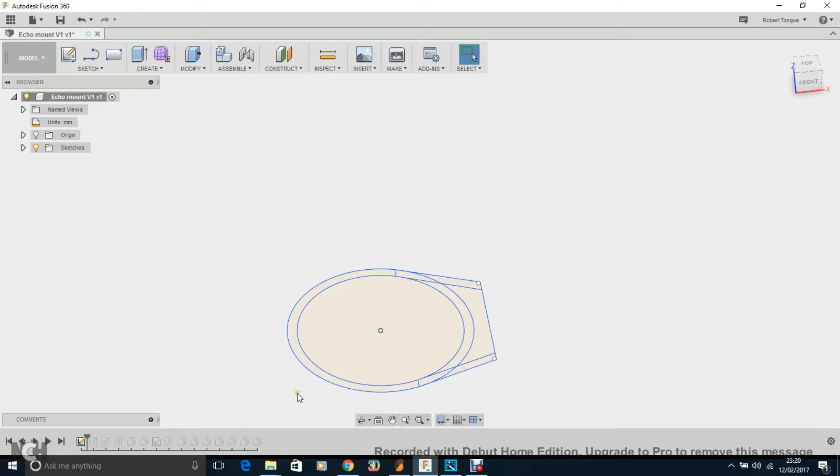So what I started off with was a sketch. The measurements between here to here are actually 84 millimeters. If I go into edit, let's have a look - there you go, so 84.5. I think I measured the Echo at just under 84 millimeters. I know the printer does good tolerances, so I wanted it slightly bigger to fit it in, and that was it. Next was a ring.

I did 5 millimeters around there, so 5 millimeters will be enough strength to cover that. What I'm going to do is extrude this base here by 5 millimeters, and then this is just a bit long here, and this bit will be against the wall with the holes in.

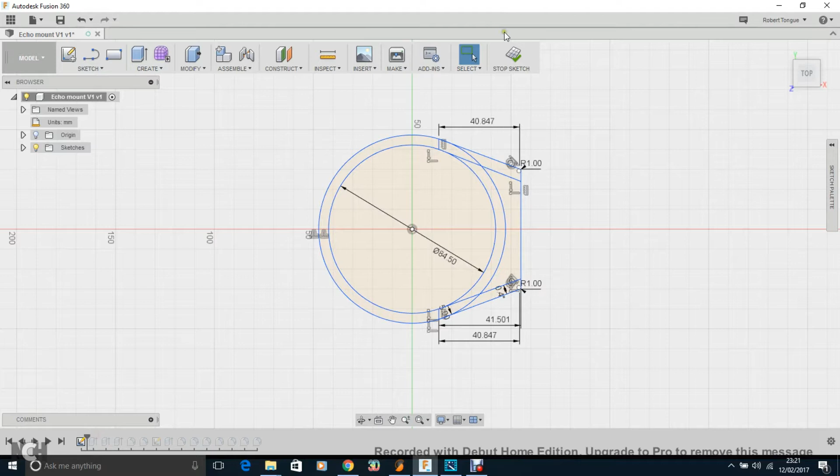So the next step was to start extruding. Let's move it along - let me just stop sketch a sec, and we'll move it along. I'm doing this with a laptop and a touchpad, so it's a little bit awkward, and I'm an absolute noob at Fusion 360. I have no idea how to use it, so I'm just mucking around trying to do this.

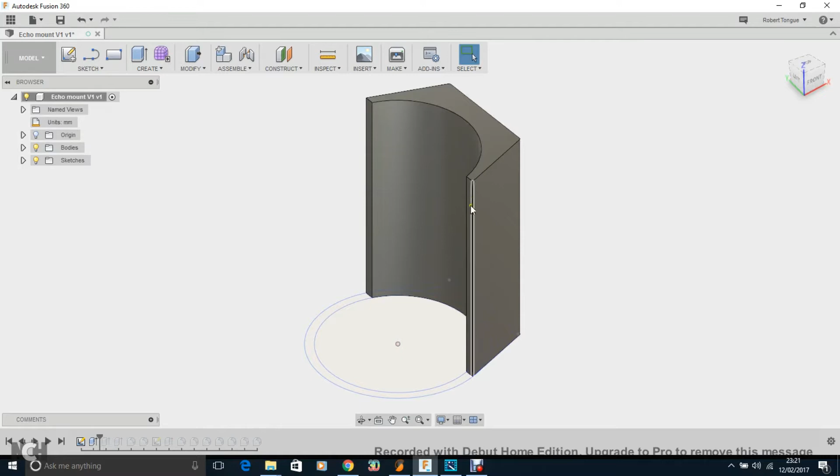So first step was extrude this bit here. I had to do it with a line there because otherwise this goes into a sharp point and then the rest won't fill it properly. So I learned that the first time I tried it.

So this was, I think, about 120 millimeters high - about almost halfway up the Echo. Next step was the base, so like I said, 5 millimeters.

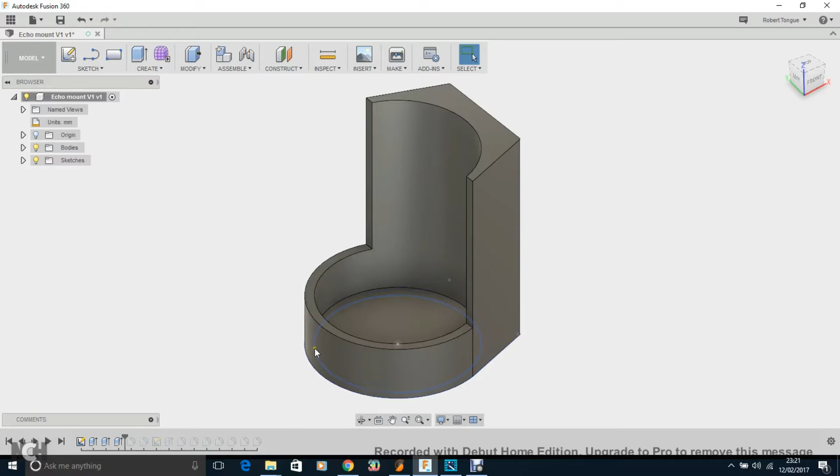Next step, the front bit here - now this bit I did at 30 millimeters. So the base is 5 millimeters, Echo would be on that, take away the 30, you lose 25 millimeters height difference basically, and that leads up to the beginning of the speaker on the Echo. So the speaker isn't covered around here.

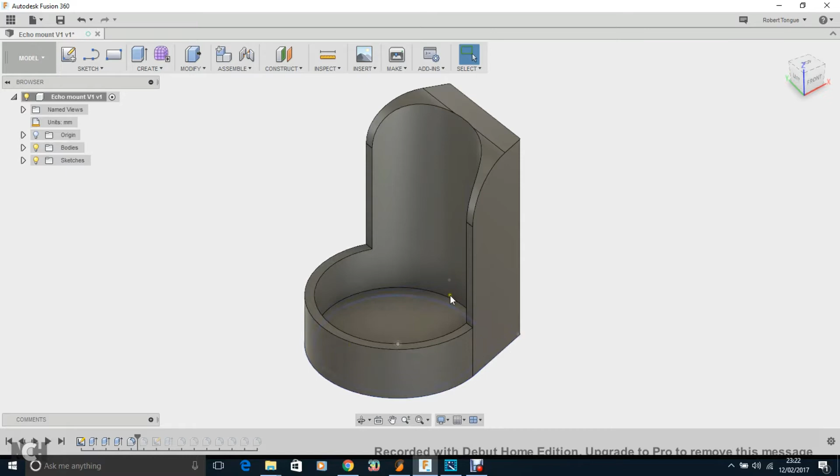So next step, just filleted these down. What I originally wanted in my head was for it to be round like this low at the beginning, and come up smoothly and join there. It was awkward for me to get a completely perfect thing like that, as you can see the movement I'm doing, but with a few fillets I managed to get it looking pretty good, and it's really stable around the Echo. So already you can see that's looking like a nice little mount that the Echo would fit into.

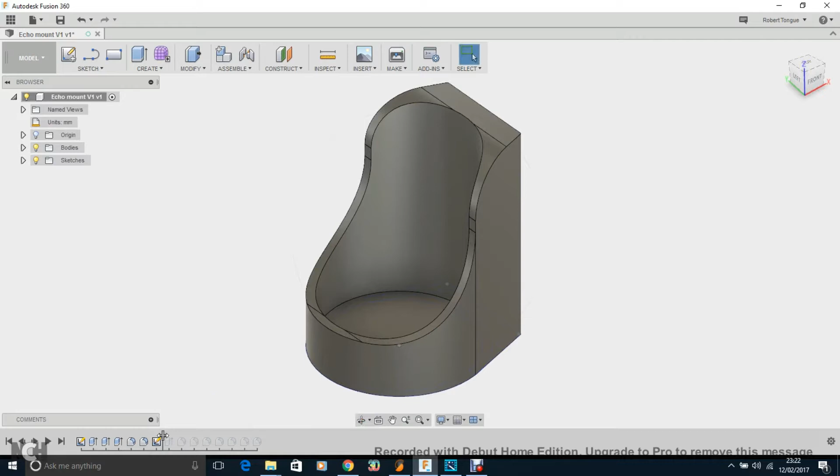So the next step was adding in a sketch, basically for around here to do some holes. If we extrude here - there we go, you can see that hole there. So basically that's for the cable, the power cable to run in.

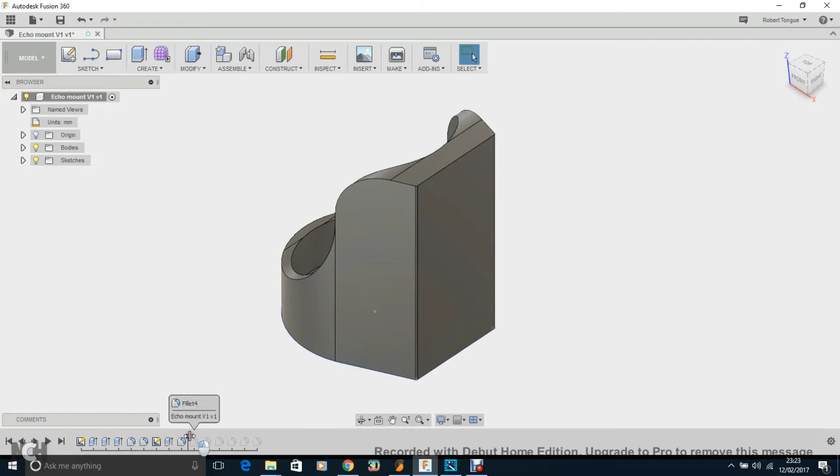And then let's go to the next bit - filleted somewhere, I think it was at the back here, filleted these bits here just by about 1 millimeter, so you didn't want too much of a fillet. Next fillet, as you can see down there, just filleted these edges here to make it nicer so there's no sharp edges on the wire.

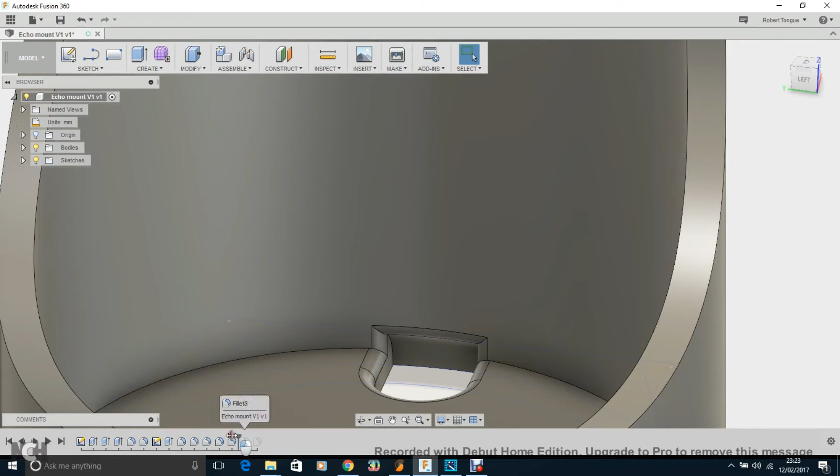And you can just about see it along there as well, so it's easier to print - it's not just a vertical bridging gap, and it printed perfectly, so I know that works well. Next bit, a couple of extra fillets there, just making it smoother around that bit, so it's nice and smooth all around, nothing's going to be sharp on the wires. The fillet I just did was this bit here, so coming down here, it's nice and filleted around there, and it actually gives it a really nice professional look once it's printed - it makes things look slightly more professional when they're filleted nicely.

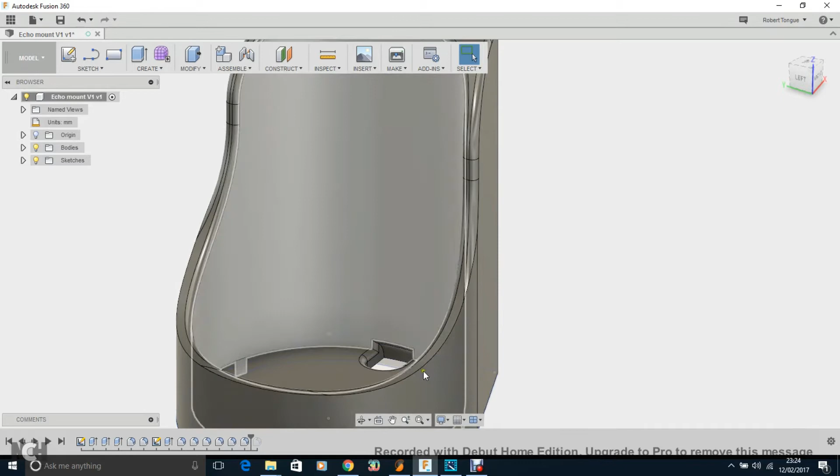And now the inside here, as you can see, both sides have fillet on the inside, which gives that nice curved effect all the way down here. And that was the last bit there. So now the whole thing has this nice rounded off effect all the way around, and we're sorted.

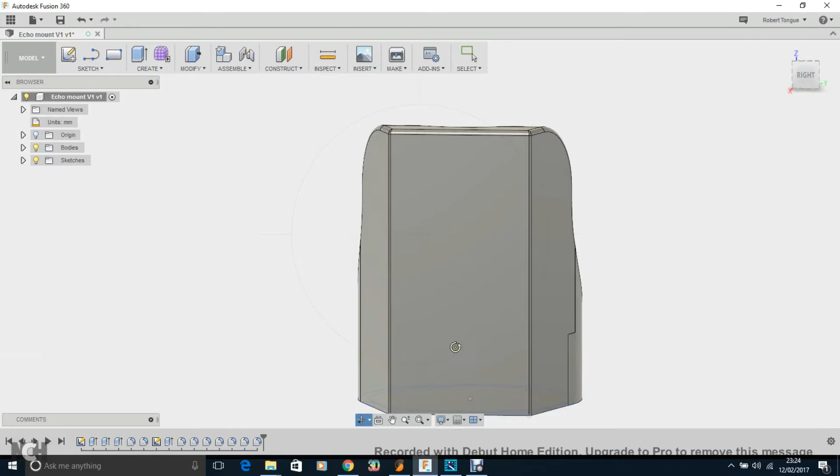So the problem was I tried doing the holes here and I could not do it. I wanted to do a hole going through, and when I did the kind of countersunk hole here, I didn't want a countersink like they normally have. I wanted a countersink where it's just a flat horizontal hole, and it just wouldn't go through. The hole would not work. It always left material here of the mesh, and if you look through it you could see the holes there, but for some reason it just wouldn't work on this. I even brought this plane forward and tried it.

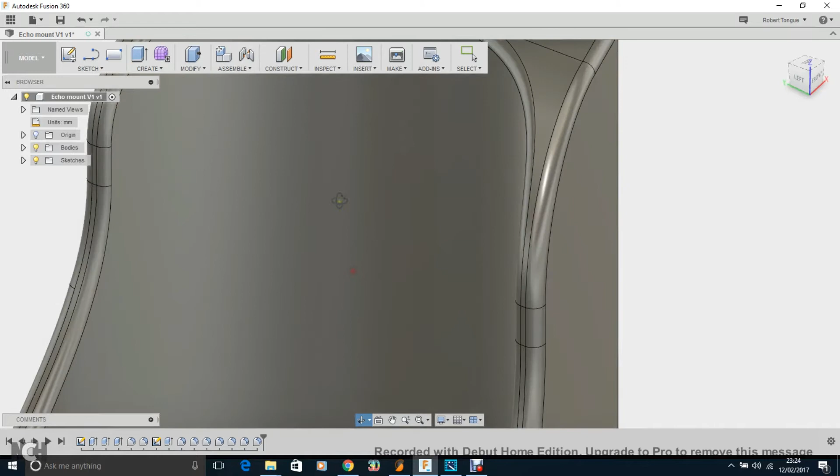So what I actually had to do was go into Tinkercad. I brought the Echo mount in. Now I had to do a lot of mucking around with this. I actually made another video showing this bit, but I thought I would make it a bit quicker here.

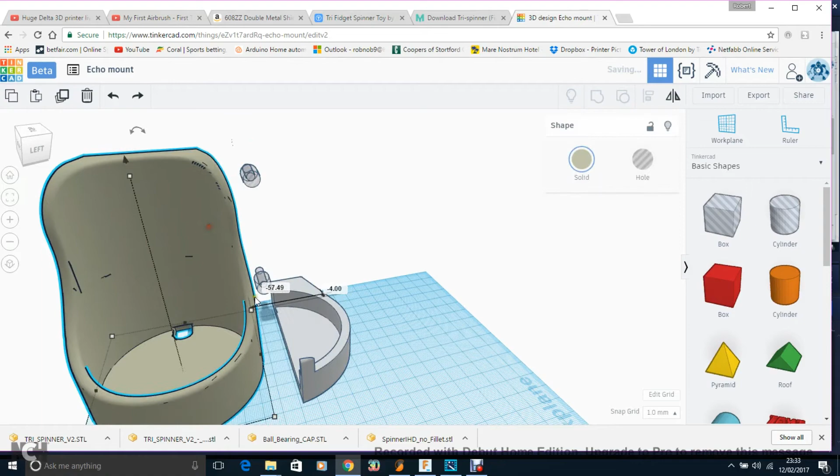Now when it came in, if I grab this and ungroup it, you can see it actually came in with this huge hole here. I have no idea why, and even when I brought it into the slicer it had that same issue - you can see that hole there, just a random missing giant polygon, I don't know, it was just a mess. I was like, how the hell am I going to fill that properly?

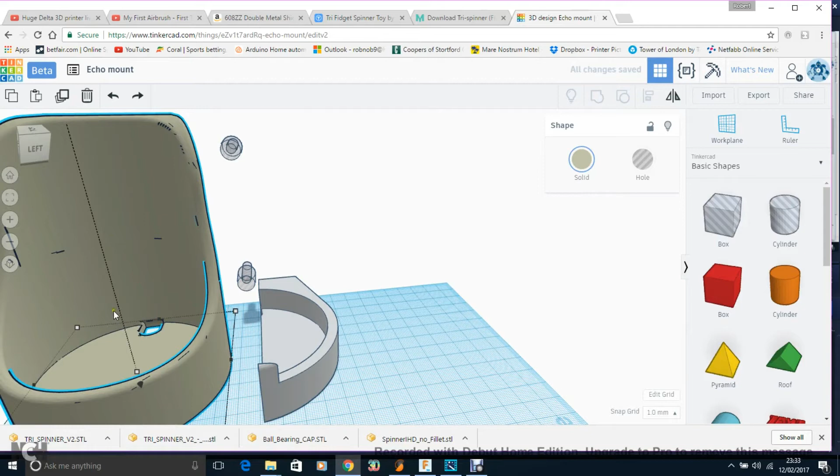So what I ended up doing was duplicating this whole design, moving this over, mirroring it, and then cutting away. If I ungroup this, you'll see the huge cuts. Let me go forward again. No, let me just regroup then. And group - there we go. And then I just slid this into place and covered that. Obviously it's better than that, but like so.

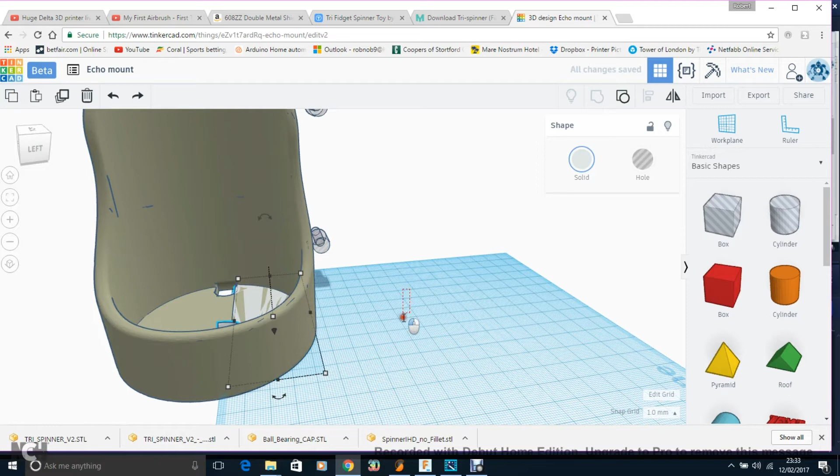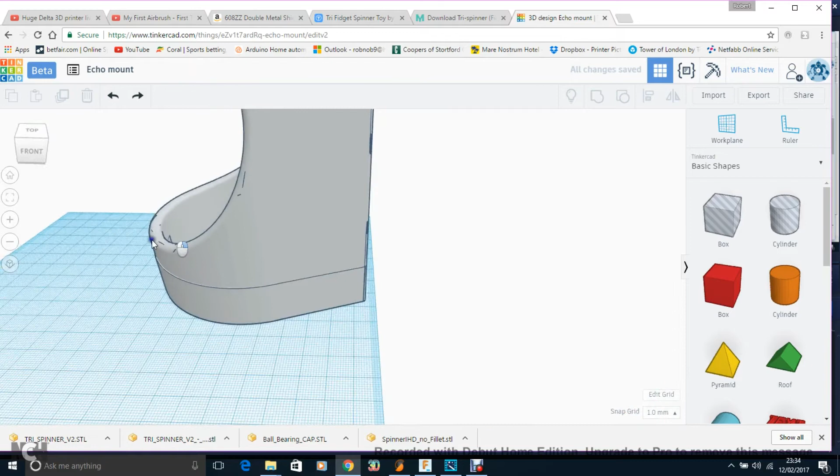So then I made these holes here, so they're both countersunk. If I just reverse back to where we were at the beginning, there we go. So now you've got the holes all countersunk. One more reverse, and there we go. So there's enough room for the washer, and then the screw to go through. And I've done it now, and it holds perfectly - the screw head's completely hidden, and the echo fits perfectly in there.

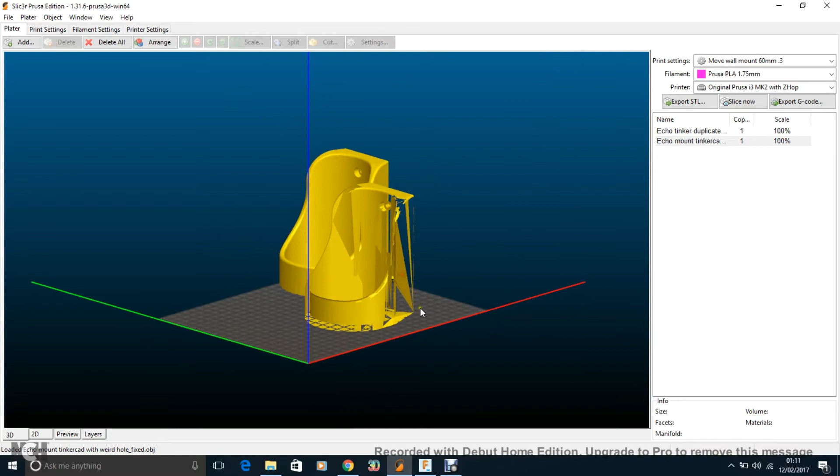Now the problem when you load this is - there you go, see, this is how it was coming out. Look at that. What? There's barely anything there. I think there's more negative space than actual physical mass to print. And this is a repaired model by Prusa slicer, which I've found hasn't actually repaired one model I've had. Even when it's just one little dodgy line like that, you can't even repair that. So it's the worst thing. To be honest, I'm really not a fan of this slicer.

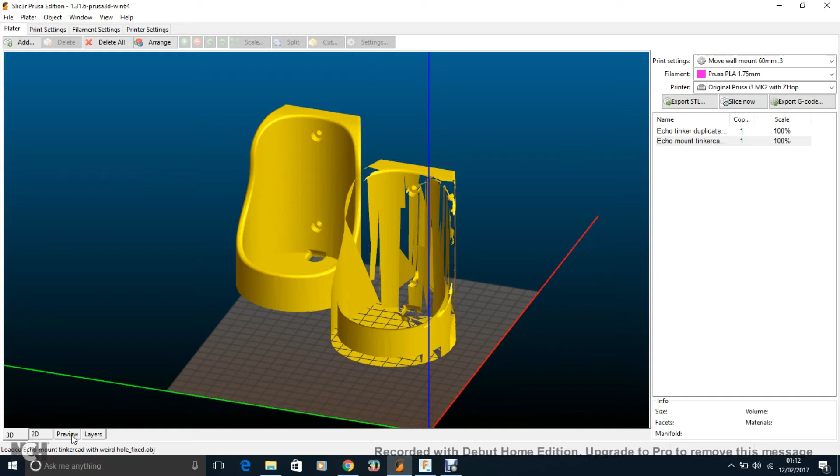Just the key things - well, a lot of it seems good, some cool settings, but the supports... I mean, you choose the support, you can't even see it until you go into the preview once you've sliced it, and then you don't get to mess around with the support at all. So I really hate that, it just makes things ridiculous. But anyway, that's how it was turning out - absolutely impossible. So what I ended up doing was using Netfabb and just fixing it, and it works perfectly.

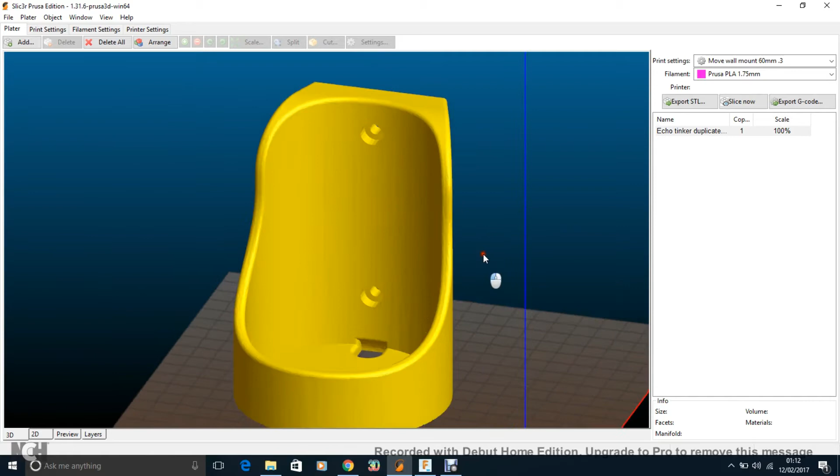Really happy with that. As you can see, I've got the holes there that I couldn't do in Tinkercad, and the bottom bit there for the wire. So yeah, overall really happy with that, and I am going to get to printing.

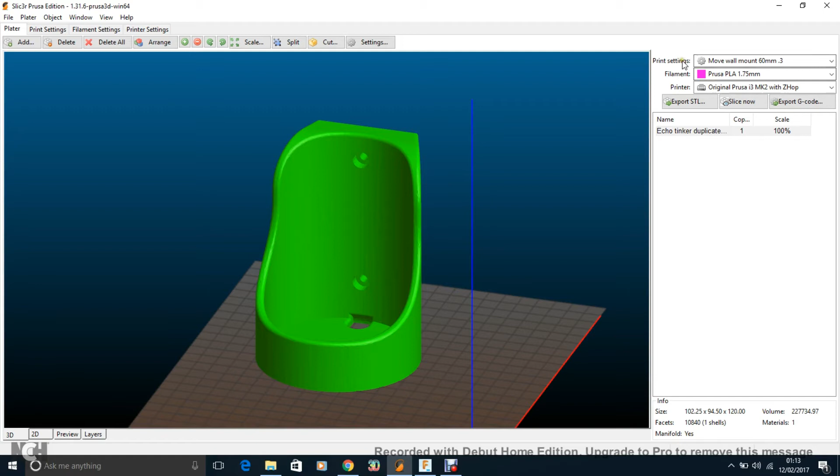So let's have a look at what print settings I'm going to use. It'll be a normal print with Z-Hop, PLA 1.75mm - this is the one I've already got set up for some other things I've been printing. So layer height is going to be 0.3. The first layer height, if I'm printing at 0.2 I'll usually do 0.3 as the first layer height, but as I'm printing at 0.3 already, I usually keep the first layer height the same. The perimeters I'll do 3 because we want it quite strong.

I usually don't do 4 because 3 is usually enough - 3 is usually pretty strong, so I'm quite happy with that. I'll do a higher infill though. 3 bottom layers and 3 top, that's fine again. I usually have most of these ticked, extra perimeters if needed, ensure the shell thickness. Shouldn't be a problem with this one because there's not much detail, it's just quite a thick model, so it should be pretty easy. Aligned always makes it look slightly neater.

Infill, okay, so here's where I'll probably change that to about 25%. I think I'll do 25% and test that. I don't think I need any more than that, especially with rectilinear, because it does quite a lot of infill for what you're getting there. I just find that anything more than that is just so solid that you just don't need it. I mean, to be honest, I probably would go for 20. I might even go for 20 as it goes, and see how that does.

So I usually combine the infill every 2 layers just because it prints a lot more quickly doing that. Skirt and brim, I just leave that with a bit of a skirt but no brim on it. Don't need support with this one, and don't need any rafts.

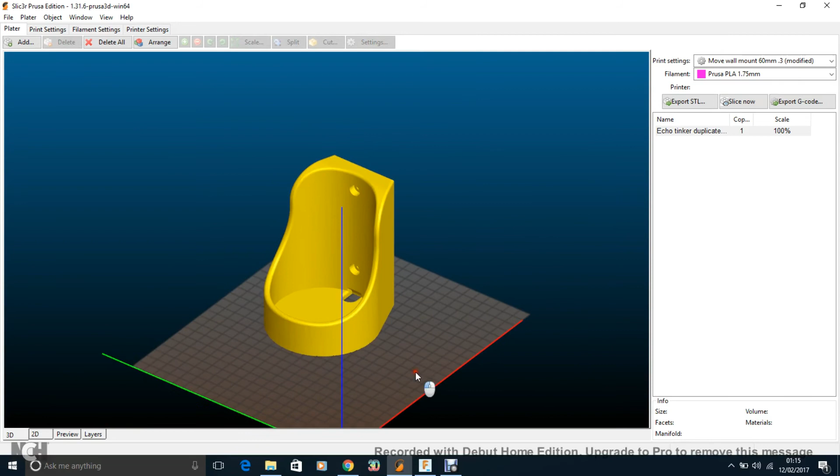So that will be that. So I'm going to slice that, and I'll probably get that printing overnight now, I think, and go to bed, and we'll see how it looks tomorrow.

And here we are, the Echo mount all printed out. Now, there's a couple of marks. Where are we? So you can see in there that line going across. I wonder if that's where... no, I think that's just the perimeters on top. There seems to be a line running along the bottom, so I'm not sure why that is there. But you can see a couple of marks around the edges too.

I actually just stuck it to the wall just to see what it would look like, which was stupid because now I've got to get that bit off of it. But anyway, it came out actually really nicely.

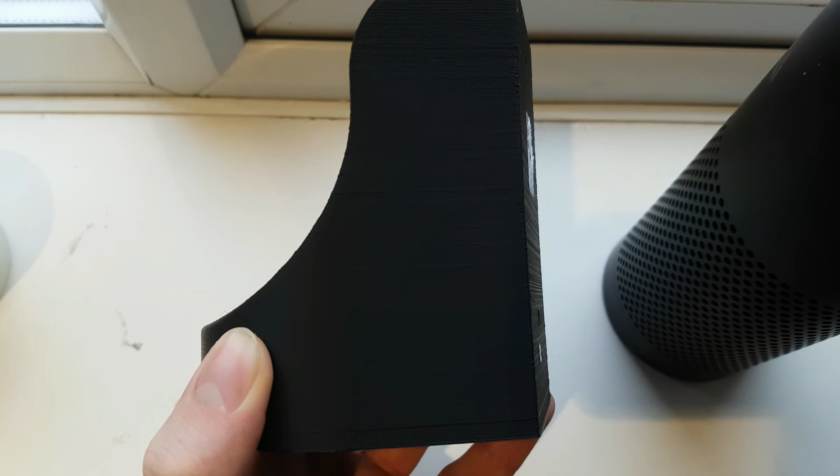And the layer lines, if you zoom in here, they look like you can see them on the camera, a bit more, maybe not too much. They're a bit more visible, especially on the back there if the light catches it. But in real life, you literally can barely see them. So very nicely, and the holes, as you can see, printed out great.

Now, just to show that it fits perfectly, the Echo actually fits so perfectly, it goes down slowly to get the air out. And there we go, slots in. That is so solid, look, barely any movement in that. That's all the movement you get. So, Echo mount is successful.

Time to print that, time to mount that. We'll see what it looks like after. But looking good. And here we are. The Echo is all mounted. If I lift that up, you can see the screws in there. Just added a washer, screw straight through the wall plugs, and Echo fits nicely in place and really solid.

Look, the tiniest bit of wobble, which you need to be able to let it go down, but that's it, not going anywhere, completely tight. And it looks really, really good. I mean, it actually looks like it was kind of manufactured properly for this. I can't see any layer lines apart from this one ridge there, slight line. Relatively smooth considering the resolution was 0.3 millimeters. Yeah, but really happy with it, really stable.

And here we are. Alexa, cancel.

Cool. So anyway, that was my making of the Echo mount. Took a while, got there in the end, and it looks good.